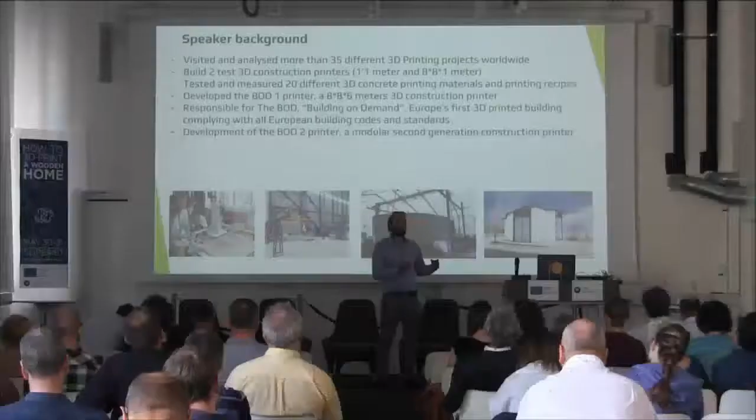This project was finished this January, and in February we launched a report in Danish, unfortunately, but hopefully soon it'll be in English as well, covering the basics of what is actually going on in terms of real projects out there in the world. So I'll try to go through this today and give a global overview of what's happening within this field right now. Later today I'll cover the project we did ourselves in Copenhagen, but I won't go into detail about that right now.

So who are we? We are actually a 3D printing company. We have no background in construction whatsoever, but 3D printing is our specialty, and we saw this area moving forward, so we decided to spend some time digging into it. After that, we spent more and more time and resources in this field, and now we're just about to put all our balls in one basket, so to say, and work entirely in this area in the future, because we find it very exciting.

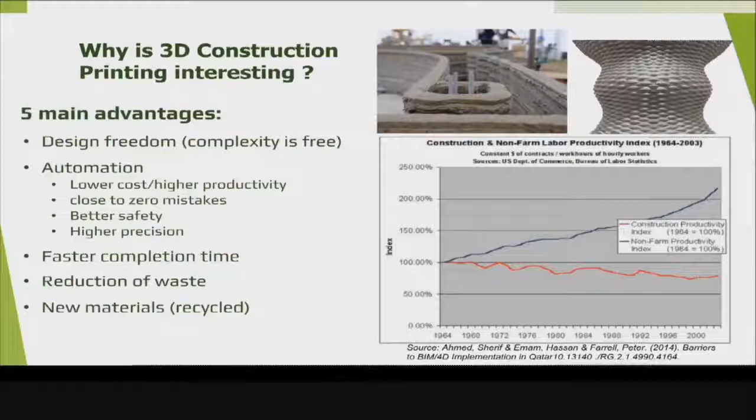There are a lot of reasons to go into the construction industry with automation, 3D printing, and other technologies. Some of the main advantages, just before we go further, is obviously the design freedom. We've heard a lot about this yesterday and today, that 'complexity is for free' statement. It's not totally true, but it will be, I guess, in the future.

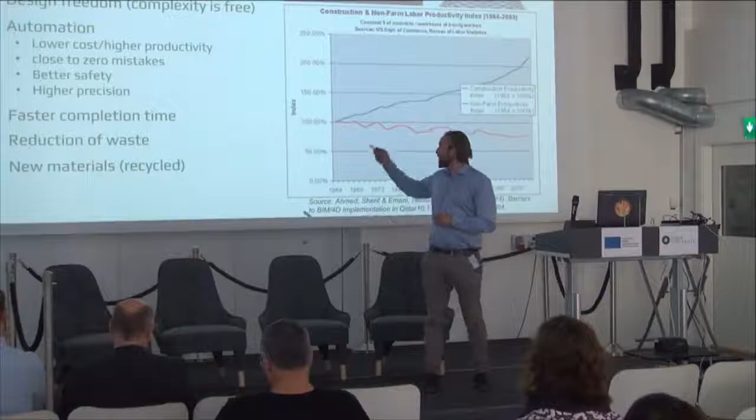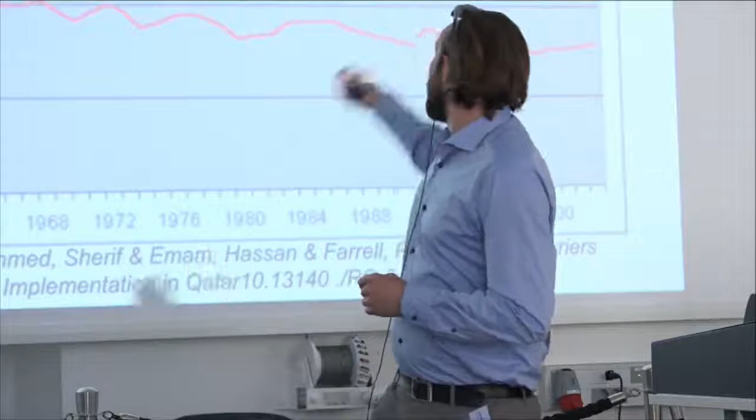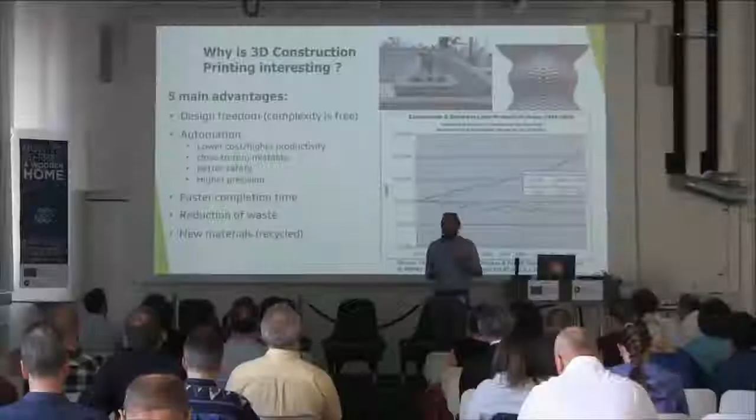Automation aspects as well, lower cost, higher productivity. If you look into the construction sector, the whole industry hasn't actually increased that much in productivity compared to regular manufacturing during the past 40 years, for many reasons. It's not weird at all, but this is one of the technologies we believe can add to the solution for that issue. Less mistakes, better safety, higher precision - definitely not yet, but in the long term. Faster completion time, reduction of waste, new materials, etc. There are many great advantages if we look a little bit ahead in this area.

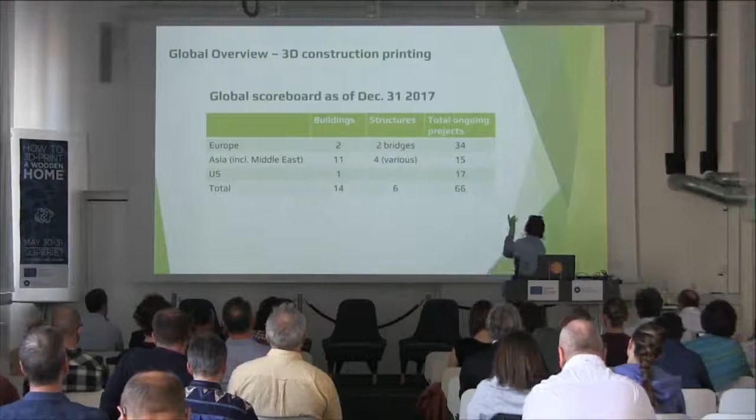So the global scoreboard right now - this is from December 2017, and this is buildings. If you look to Europe, we have 2 completed buildings at that time. By buildings, I mean real finished structures that actually have permission to be used as buildings, not test objects. The other ones are structures or other projects.

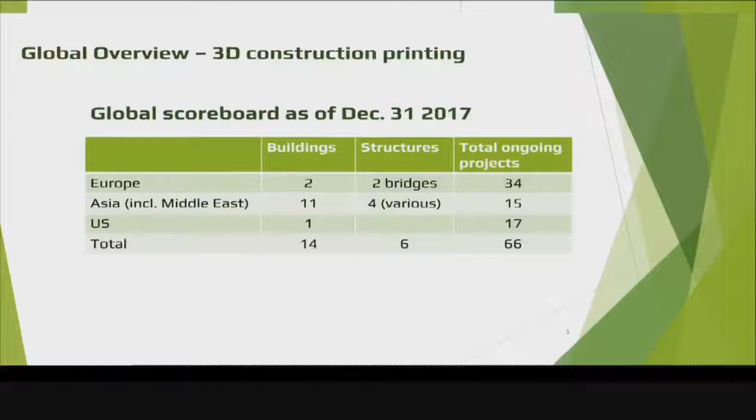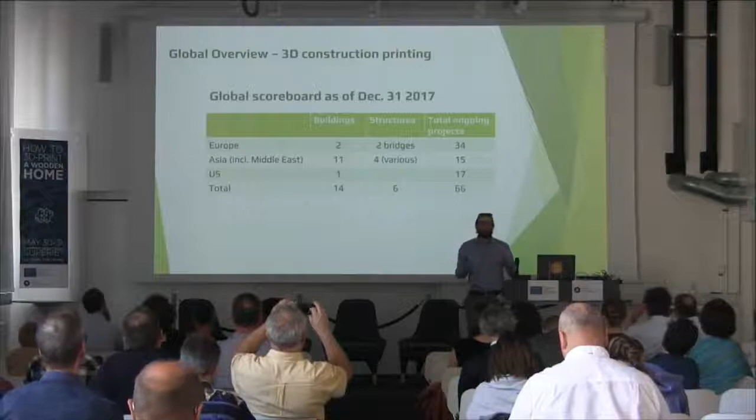If you go to Asia, we have a lot more, and I guess actually this number is a bit low, but these are the ones we could verify are actually being built. It's always very hard to tell if you haven't been there yourself, whether it's actually been 3D printed or something else, but these are the ones we could verify. The US at that point had one, and one more came in March this year. So a total of 14 buildings 3D printed in the world. Very few, but it's still 14.

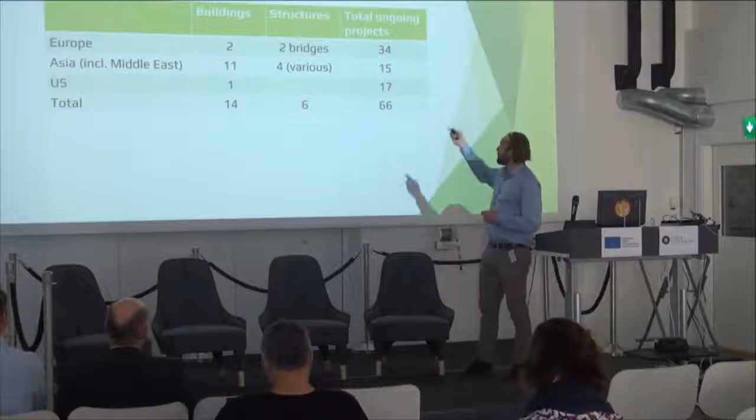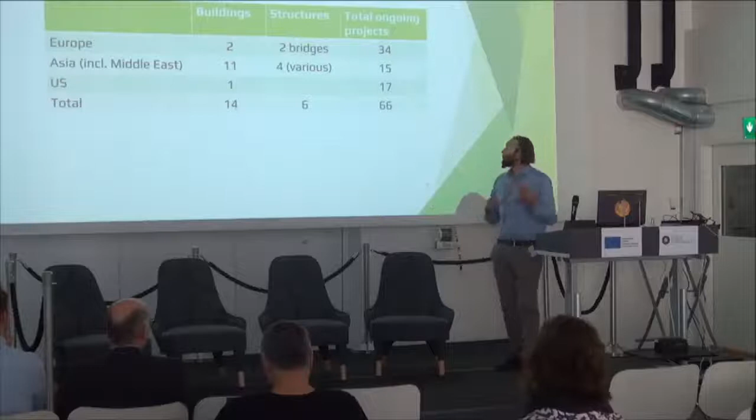If we look at other structures, we have a couple of bridges in Europe, 4 other structures like bridges in Asia, nothing in the US as far as I know, so 6 in total. And if we look at the projects worldwide, we're roughly at 66 projects. It's actually higher now because we made the total count back in September last year, and a lot has been added to the field since. It's a very fast moving field, and a lot of people are going into this area, so it's very hard to take a snapshot of this and present it.

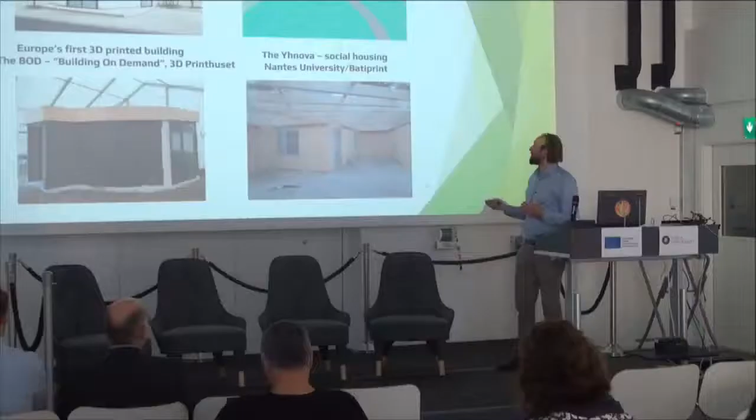If we take a short look at the projects here, this one is our own project in Copenhagen, one of the 2 in Europe. As I said, I won't go into detail with that right now, it comes a bit later.

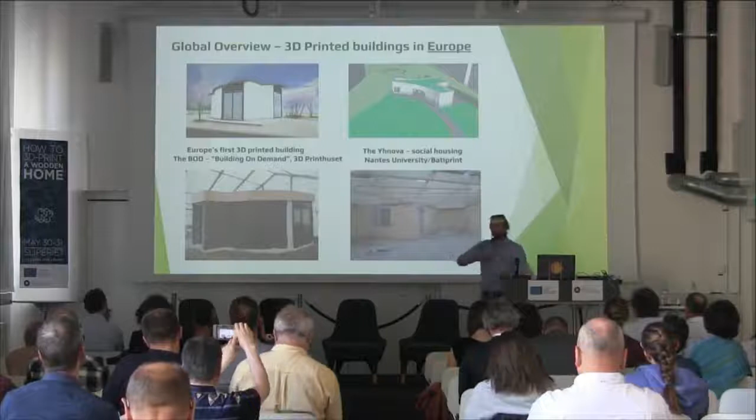The other one is a project in France, in Nantes, whereas we've used an extrusion of concrete. In France they actually printed the insulation foam and cast the concrete afterwards. So it's the reverse way of working, but a very interesting project as well.

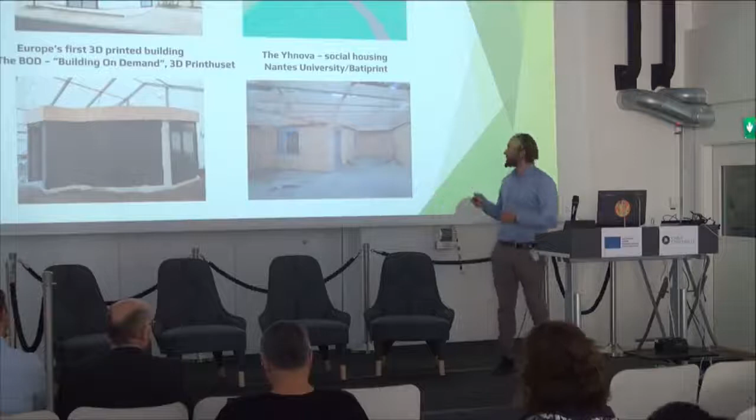If we go to Asia, this one someone presented yesterday, I think 3-4 years back. The Chinese company Winsun announced they had built like 10 buildings in 24 hours, and it cost like nothing, and so on. Since then, they've actually been printing a lot of other structures, some quite impressive ones. They're definitely the leader in terms of number of actual projects realized.

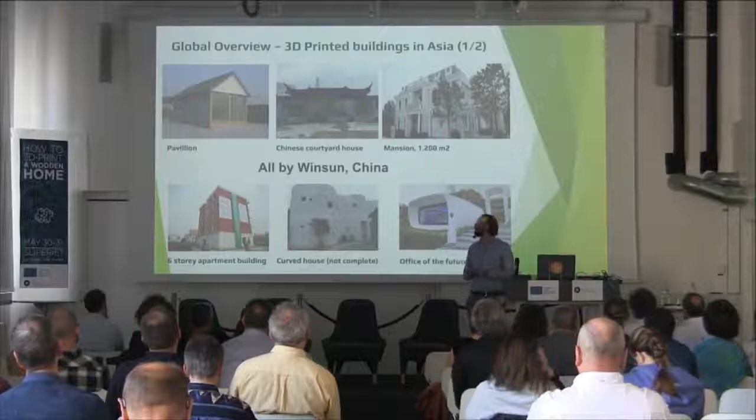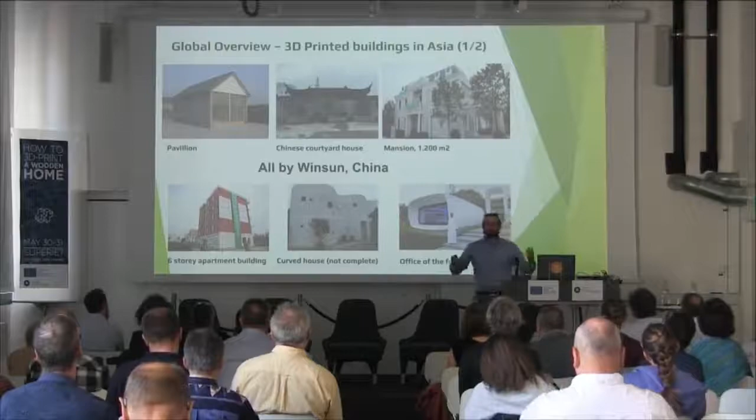But as you can see here, this is the real printed surface, so this is the printed part. There's obviously been a lot built onto it, and I will come closer to that fact later. We have something in Dubai that's also printed by the Chinese in China, and shipped to Dubai.

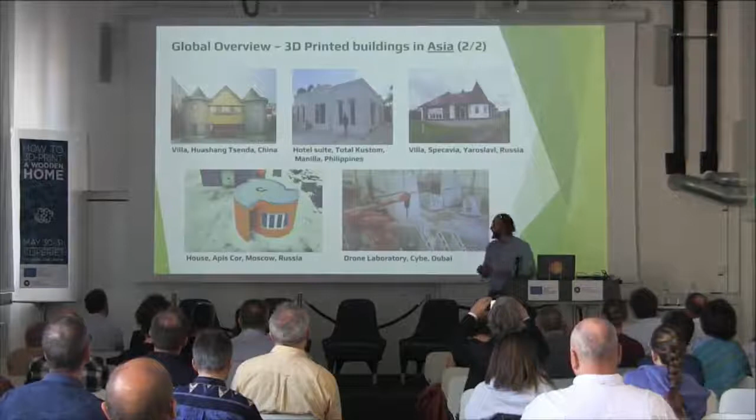We have some more houses in China, a couple in Russia, and some things in Dubai. This one is on the building side, an actual hotel suite. It was big in the media a couple years back in the Philippines. This one in Yaroslavl in Russia is also a real project. This one is in Moscow or close to Moscow, on a construction site as well.

So of these 5 projects, these 2 don't have a building permit, they don't really live up to any standards, they're just produced on a construction site. But these 2 are in use for real, and this one as well.

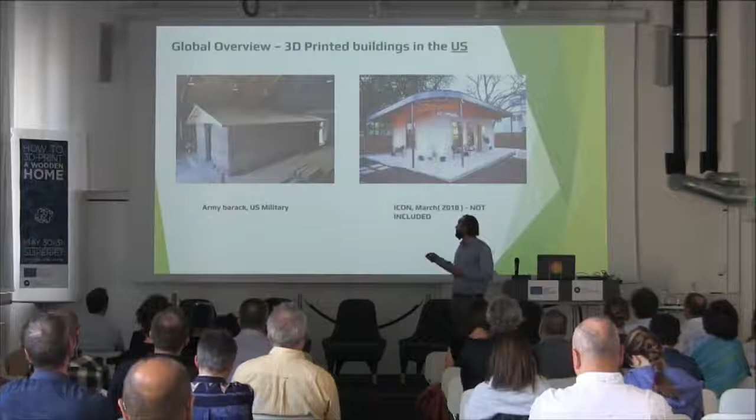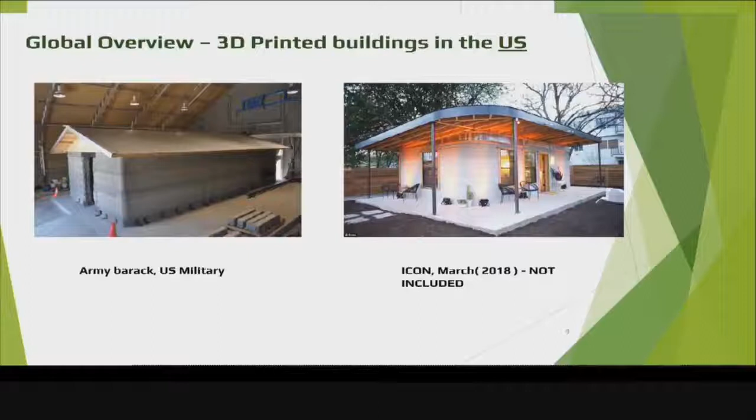If you go to the US, a bit behind in terms of number of projects, but ahead in some other fields. The US military announced this building last year, and then this year in March - I haven't included it in the total count, but wanted to show it as well. It's a house from a company called Icon, that launched this as a concept for cheap homes in the future in the US.

So this is actually all the finished constructions in the world. It's very, very hard to get a global overview. Thank you so much.

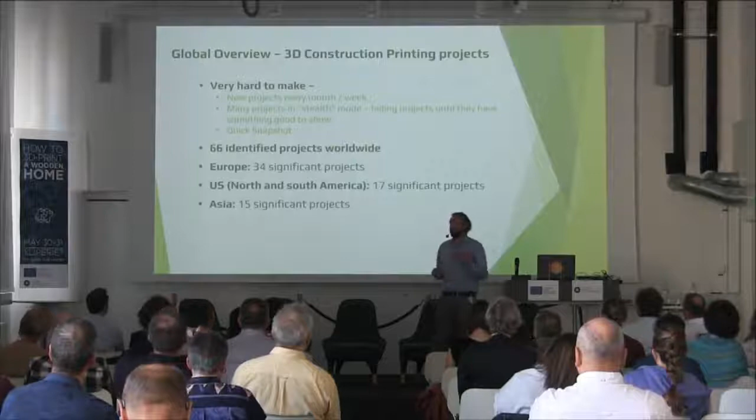Now I want to say a couple of words to that, a short conclusion on the overview. As I said before, it's very difficult to make a complete overview of an industry developing so fast, because new projects pop up every single week. New things happen, and some projects go under the radar and aren't big in the media. So if you're not very attentive, or don't by accident stumble upon them, it's not sure we have them within the project.

So there might be some projects we have missed as well, obviously. But yeah, 66 projects worldwide. By projects, it could be, for instance, universities researching in a field for more than just one project, but for a longer time, like this project here.

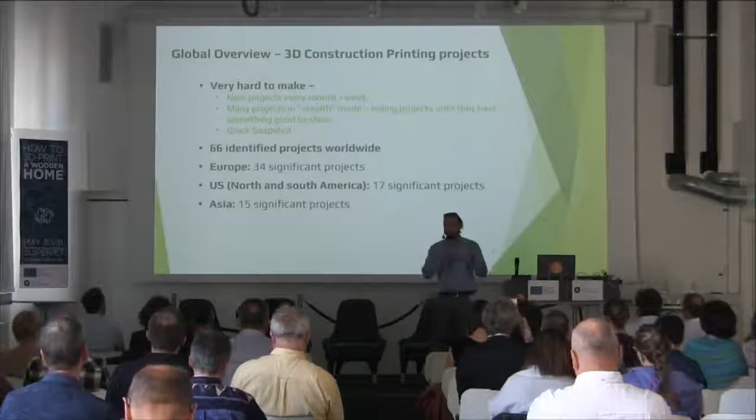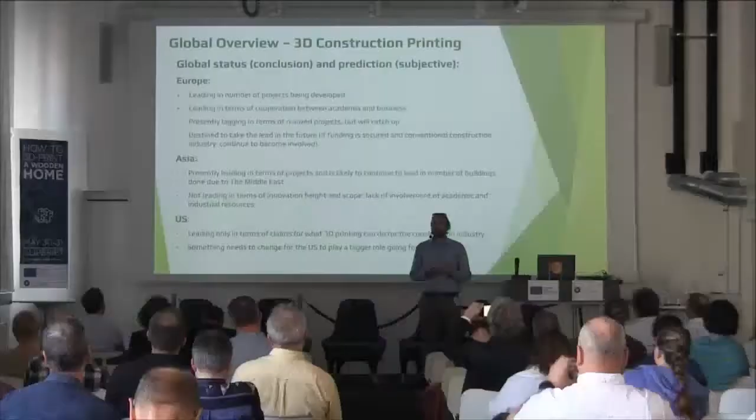So if you could say something in general about what is happening where - if we look at Europe, we're actually leading in terms of number of projects and the level of research here, because we don't have as many buildings compared to Asia, for instance, but we have many more projects and a higher level of technology, if you look at the European research institutions and companies. I think we will catch up in terms of number of projects very soon, because it's starting to be easier to get the permits, and once it's been done once or twice, it gets easier. So I think we will catch up soon.

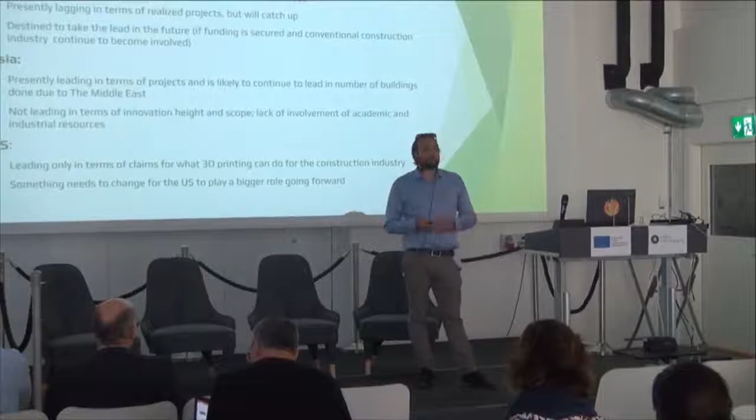Asia is definitely leading in terms of commercialization of this technology. But if you look at the base of what they're doing, they're using a very simple form and shape of the technology, but doing a lot with it. So in that area we have a lot happening, but the research is really developing in Europe. The US, for a number of reasons, is actually quite behind, and it's a bit weird because it was invented in the US by a guy called Khoshnevis, who has claimed around 100 US patents within this technology - so that might have scared competitors off.

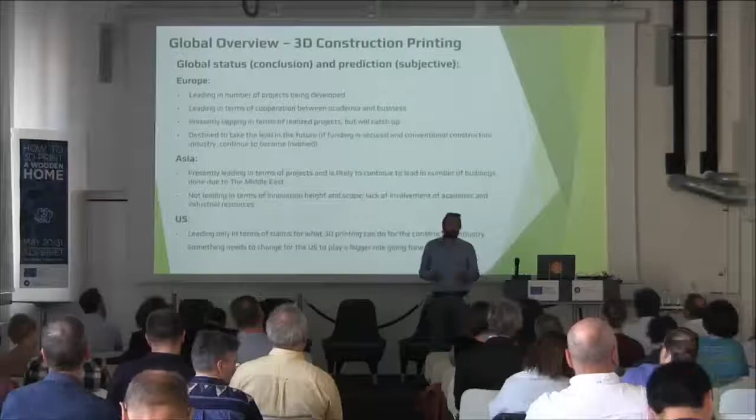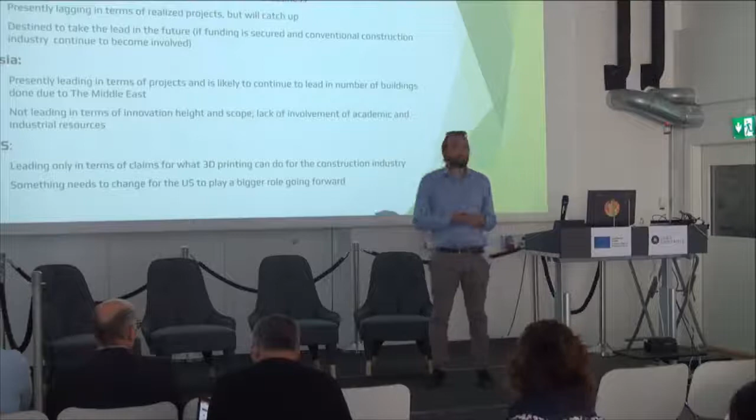It could also be something with the ways you insure houses in the US that keeps them back. But now we have two houses, so it's the same in Europe. So it could be that they are actually developing fast as well. And then again the Middle East, which right now we count as Asia, will be moving a lot forward, especially Dubai and Saudi Arabia are really pushing into this area. Most European and Chinese companies working within this field are actually working as well in Dubai and Saudi Arabia to do new projects.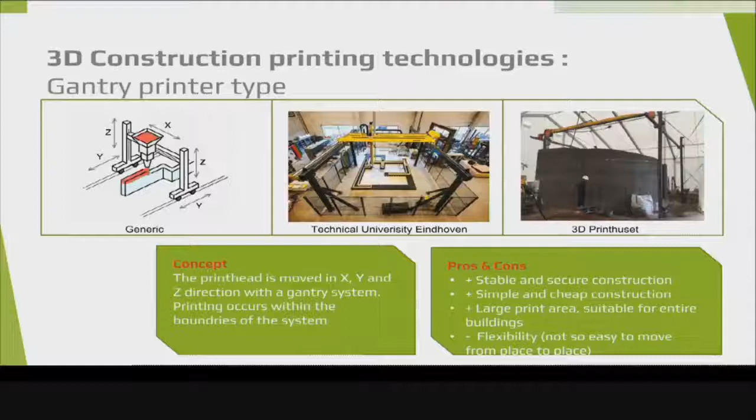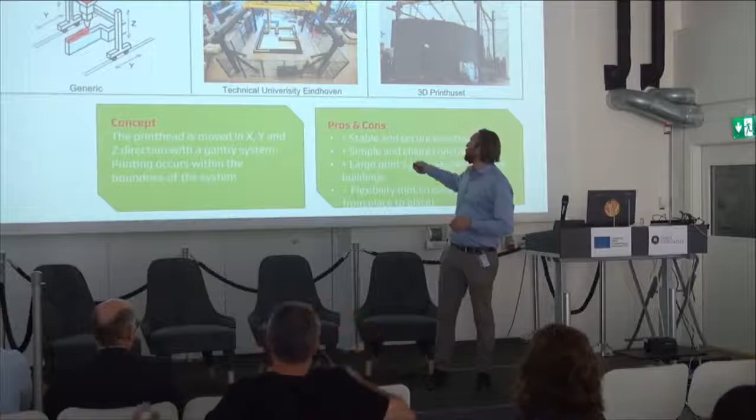As you can see, it's the way the University in Eindhoven is printing, and it's the way we have printed. It has the pros of a very stable, very simple construction. Obviously it's quite difficult to move because you need to uninstall all this base, move it, set it up and calibrate it. So it's very stable, easy to use, but difficult to move. We have seen quite a few of these machines in construction halls, like this one in Eindhoven, and fewer of them actually on site, except for our own here.

Then we have the robot arm, the robotic arm. Usually there's a couple of European companies that work with this, like Cybe, for instance, and XtreeE. The concept is you take a standard industrial robot, which is quite easy to purchase, and then apply a printing extrusion nozzle of some kind, as you can see here, and then make shapes. It's a smaller mechanical system, but it's very well supported by the industry. It's standard robots, so you can get spare parts everywhere. It's easy to move, but it's more expensive.

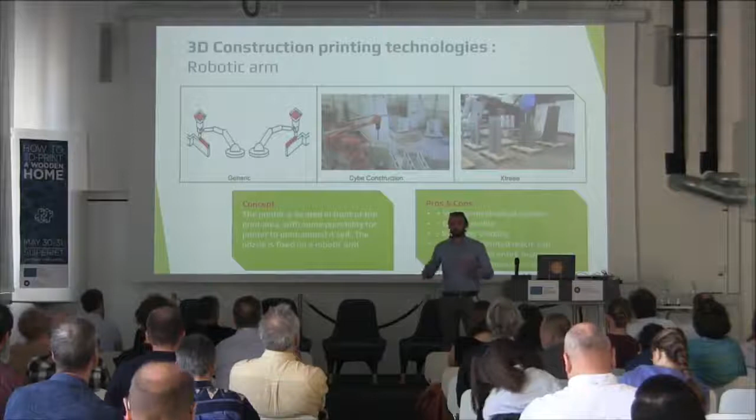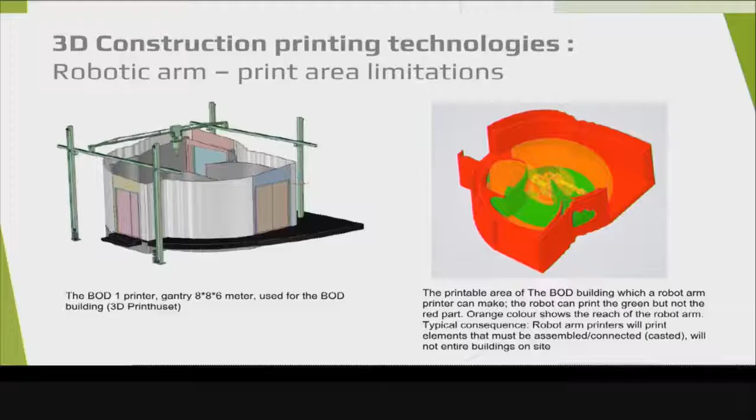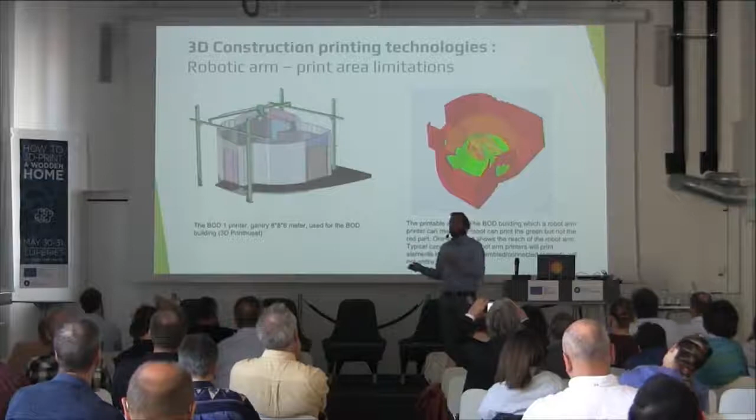It's a bit more difficult to program and control, and you have a more limited printing area compared to the other ones. So there are advantages and disadvantages. As you can see in this example of our house, if you took a conventional industrial robot, one of the biggest you can actually get, it's really hard to print an entire structure with it. So for the robot arms, you can see right now that they are printing more in terms of modules that you apply to the buildings, while the gantries are printing either entire buildings or larger modules. That's the difference right now between those two technologies.

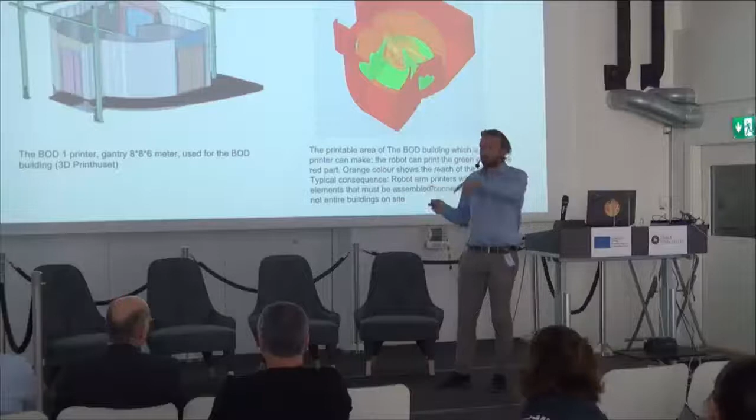There's a couple more, for instance the powder-based print we heard about just before, and some crane systems, but they are not very widely applied yet in the construction industry.

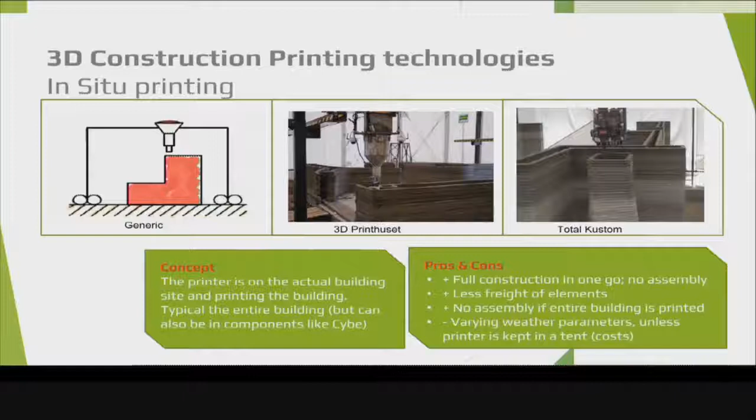Then in terms of construction, you can build on-site or you can build in a construction hall. When you print on-site, you have the advantage of no assembly, so you can just print directly and you have a house. The disadvantage is that you need to move the printer out there, set it up, calibrate it and get everything to work. You are also quite vulnerable to weather conditions, environment, temperature changes and moisture levels and so on.

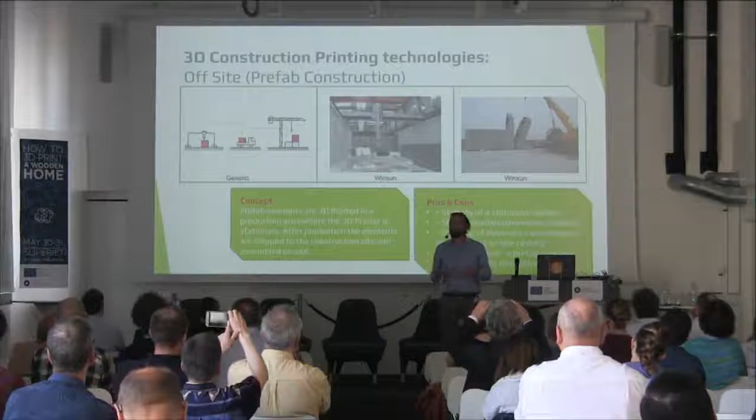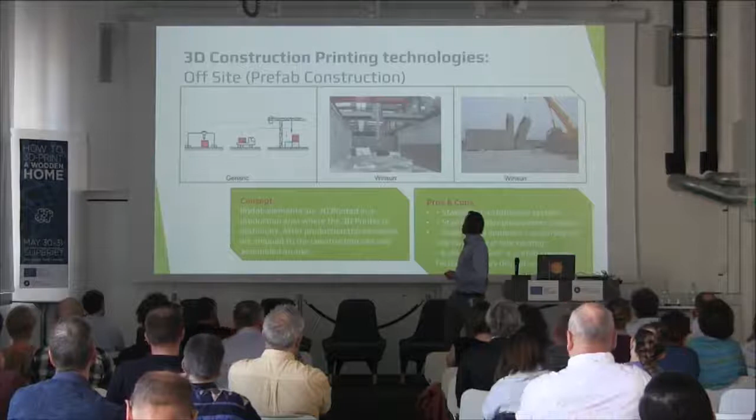Whereas if you go to the in-hall production system, you will have very high control of your environment, the same stable conditions every day. So it's very easy to print a lot and have stable conditions. But on the other hand, you'll have to transport the elements out to the site and install them there. So there are applications for both, and both are being used out there. All the Chinese ones, for example, are made in a factory and then transported and installed on site.

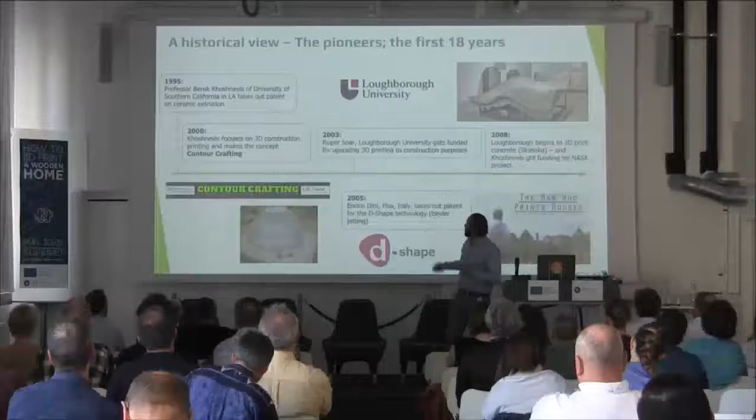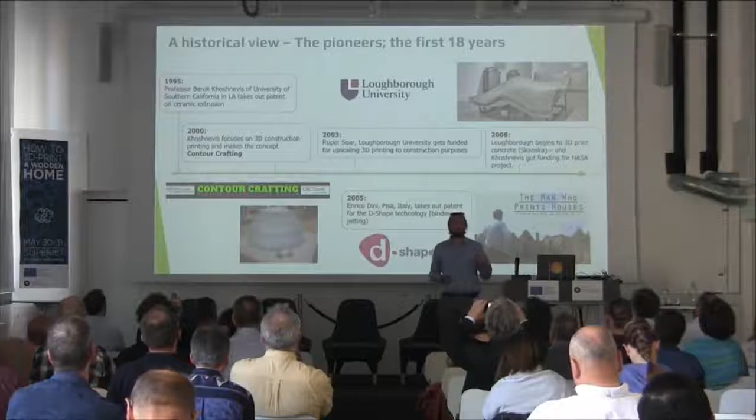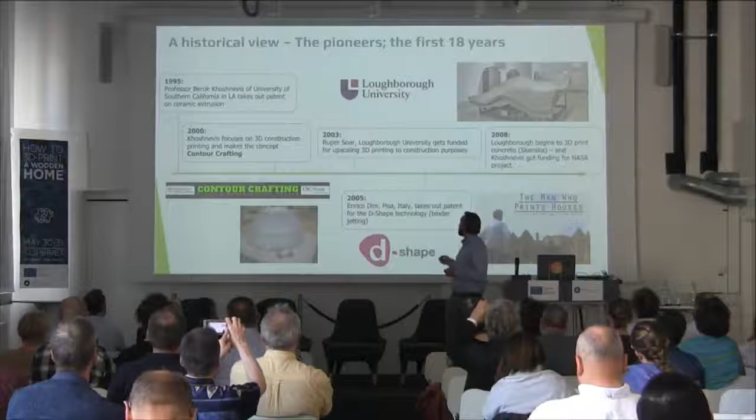In terms of history, if we go a bit back, Khoshnevis Berok, I think he coined the term in '95, but formed the company Contour Crafting a little bit later. He was the first to actually start taking this additive manufacturing into the construction industry. Since then, during the 2000s, it was kind of slowly picking up. We saw Loughborough University going into the field, and Dini, who I believe made the technology for the powder-based printing in Italy, is actually quite early as well. Loughborough, they're now, I believe, working with Skanska.

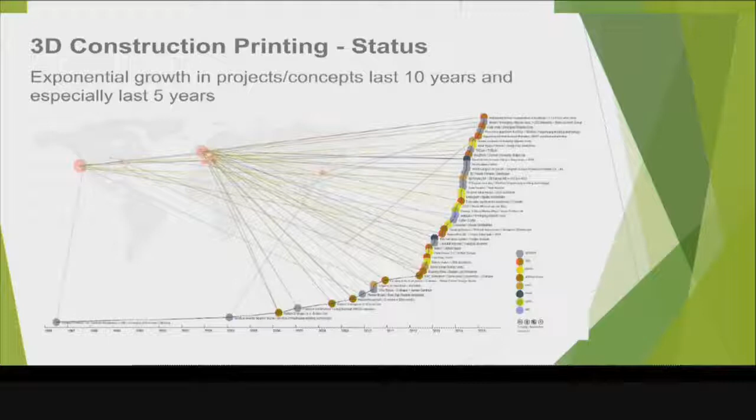But then, it might be a bit tough to see from there. This is 2012, and this is 2015. So you can see a lot of projects coming into the field. There's not been any slides like this made since, but it's really exploding right now.

So these can also just be small test or research projects, but there's so many people going into the field right now. So it's really amazing. It's a really interesting field to be in because so many different things are happening all the time.

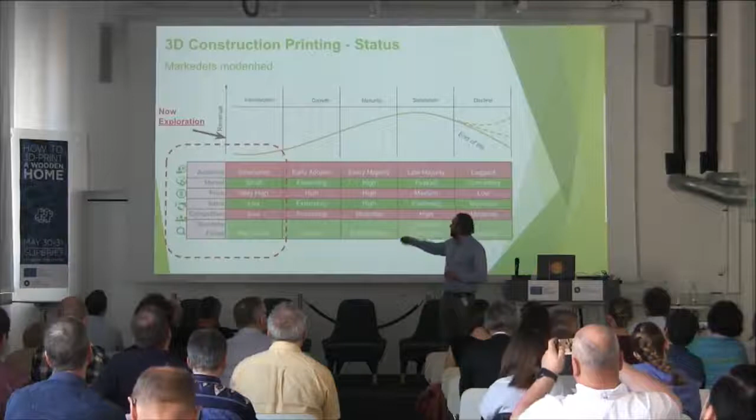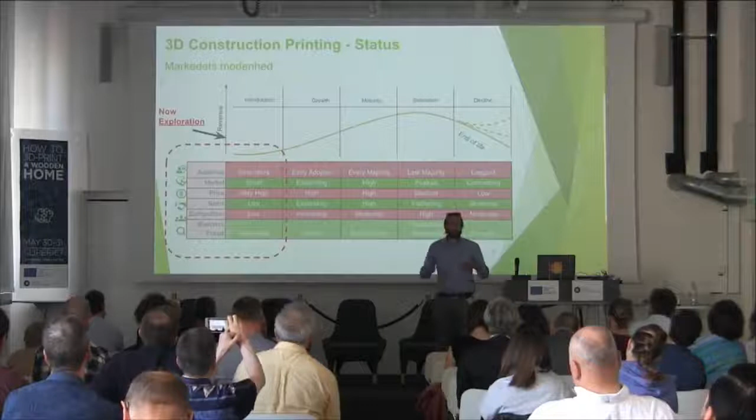But if we look at the state of the art, where are we in terms of this technology, and can it actually be used out there in the construction industry? If we look at how technologies usually are adapted into a culture, we usually see an introduction of technology where we have mostly innovators, people like all of you, who are really thinking ahead of themselves. Very small market, very high prices, low sales, low competition, and the overall focus of the business is awareness—going out to tell about the technology, to showcase, to do tests, and learning and development. Then if you get further, you'll hit maturity and actually have a market.

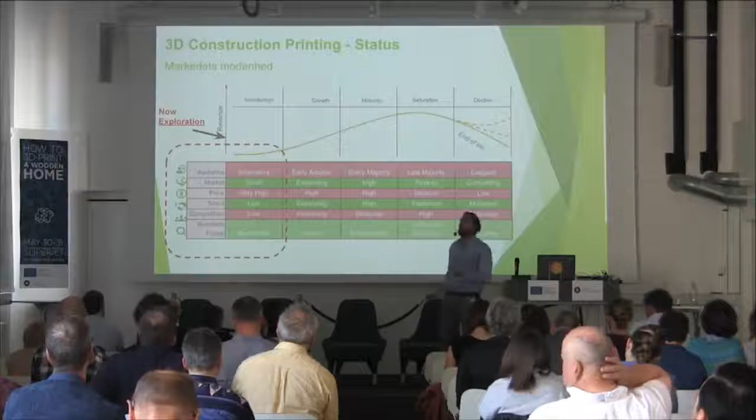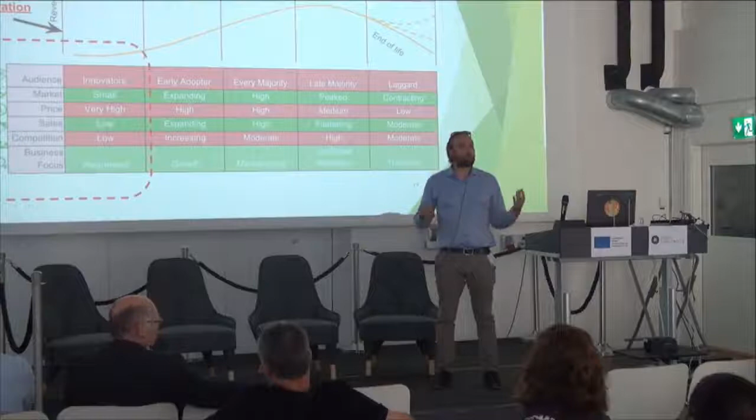But just to be very clear, the overall technology, we're here. If you look all the way around, all houses being built right now with 3D printing are demo projects. We don't see any demand. It's very slowly beginning, but the demand is close to zero. It's maybe 0.01% of the construction industry who are interested in this technology at this point.

But obviously that will change. Right now we need to recognize we are really here. It's a new technology, but that's all right. It needs time to develop.

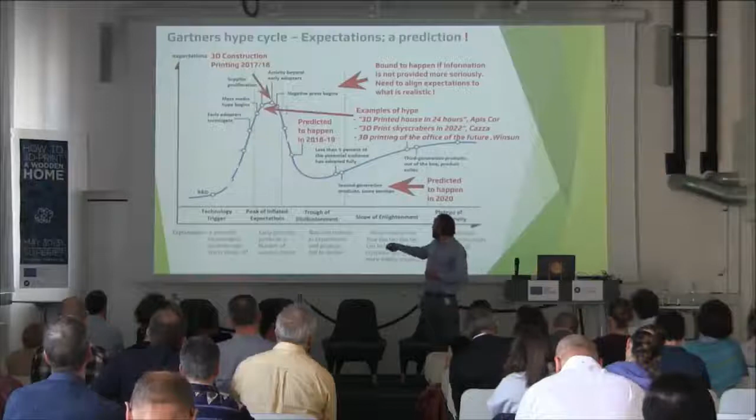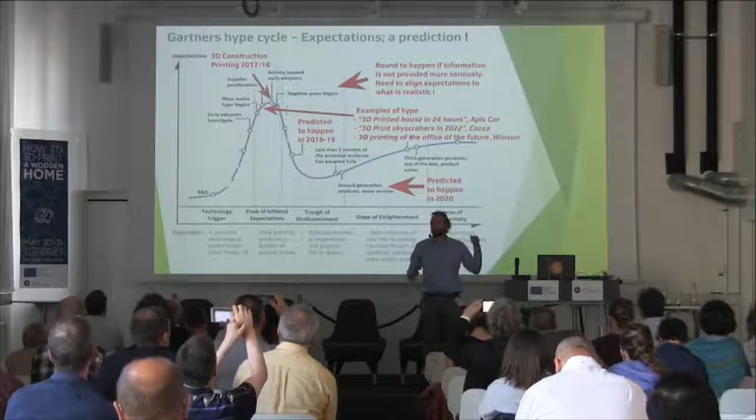If some of you have heard about this curve, the Gartner hype cycle—it describes that if you take a new technology and put it into the market, at some point in the early years you'll hit this point, where the hype is going upwards and the time going outwards. You'll see crazy articles and create this media hype. You've seen it with many other technologies like VR, cell phones, computers, internet, and so on.

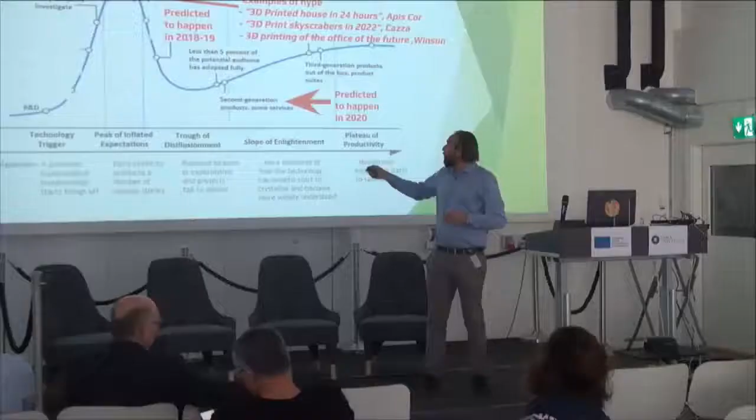You'll see it in almost every new technology you get introduced to. You'll have some type of hype that at some point will disappoint, because people think it can do a lot of things and then it can't really do anything. And then the whole media, the common people, lose interest, but the industry moves forward and creates the second generation of the machine, then moves forward and creates the third generation and starts making projects, and so on and so forth. Then slowly it will come in.

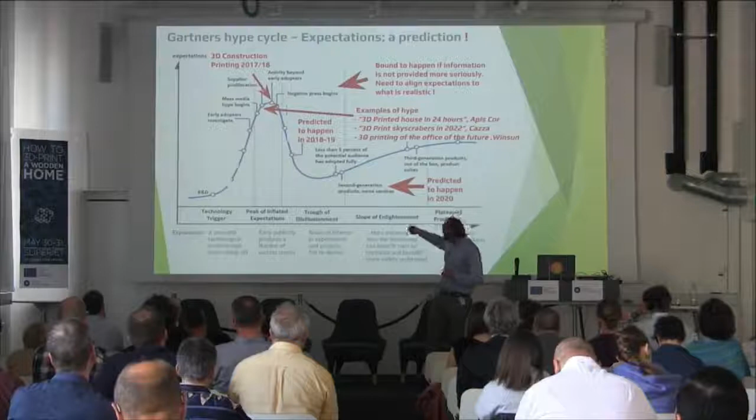So our estimation based on what we have seen right now is that we are actually just about at this tip right now. We have seen a lot of crazy claims in this industry. I don't know if you are from the industry, so you might have seen some of the YouTube videos.

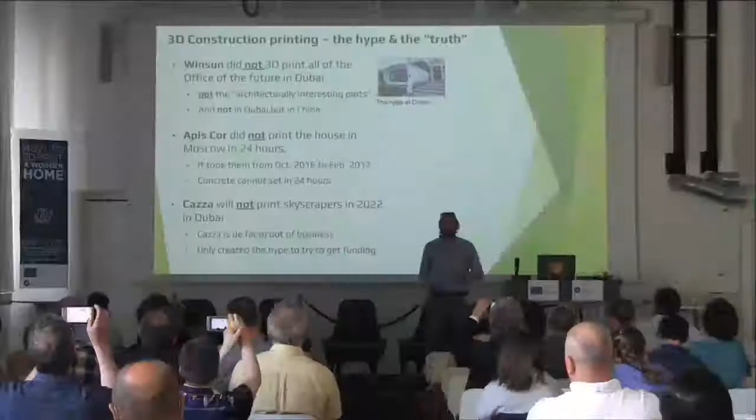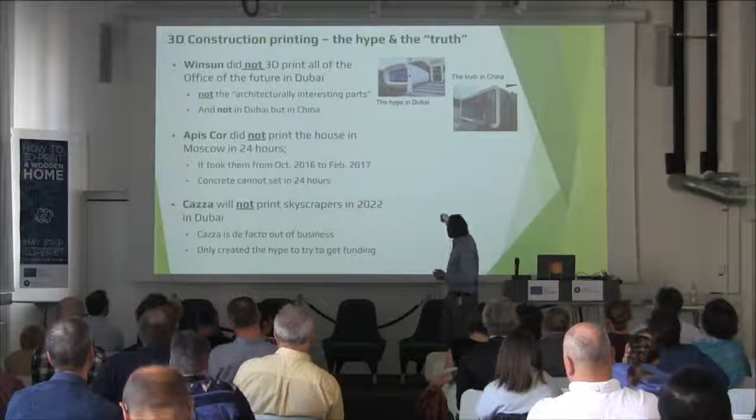For instance, we have this office of the future in Dubai—wow, so much design, so interesting, and so on. But then you go to China and see the real thing behind all this shell. It's obviously still impressive, it's 3D printing, but it's really a simple shape. You could have cast that quite easily. All the interesting architectural details are actually made by craftsmen afterwards. So there's this one—it's really interesting, and gets a lot of media attention, a lot of articles, but this is the real deal. This is what's actually 3D printed.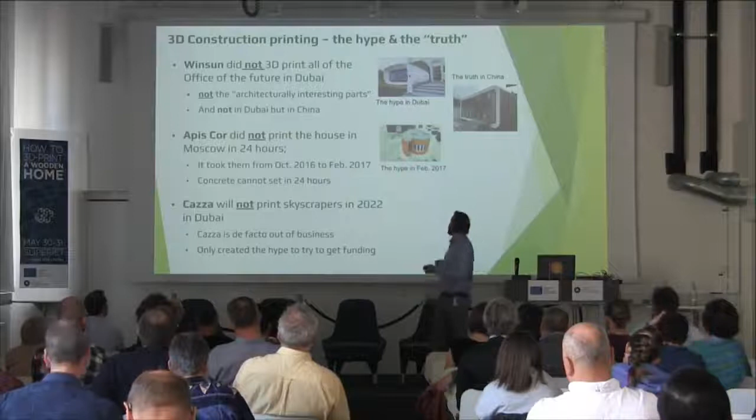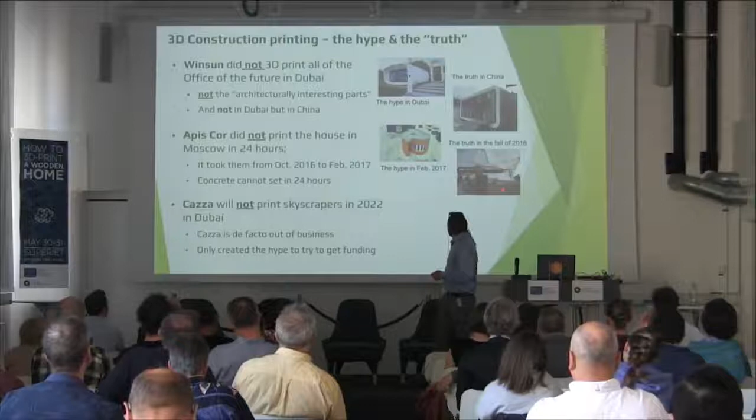And then we go out to see, like, '3D printed a house in 24 hours.' And they said that in 2017, in February. But we went to visit them in the fall of 2016, where they spent 3 days printing this. So this is obviously not true either. There's a lot of this hype being created out there that's simply not true.

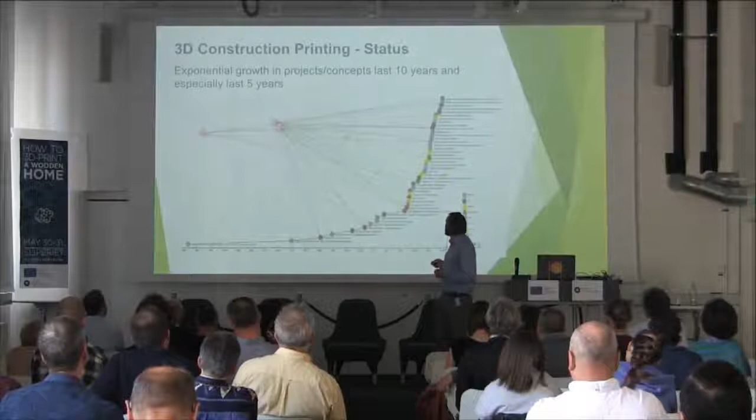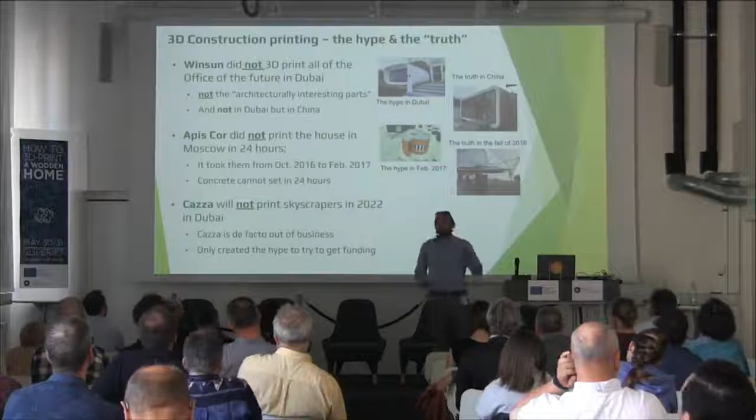And if we go back, here you can see the focus is awareness, so it's not weird, it's all right. But I think, if we don't want to disappoint the industry too much, maybe it's time to cut down a little bit on the hype and start making more real projects.

Last thing, I don't know if anyone actually got to notice this. There was a company called Cazza who wanted to build skyscrapers in 2022 with an app.

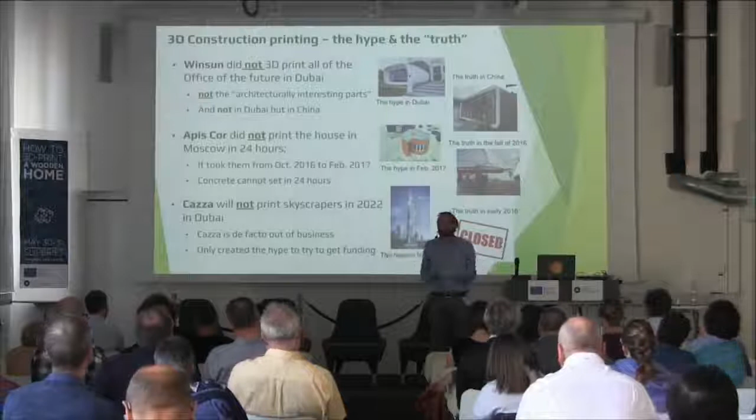They're closed now, but it was just another example of it's just not doable. You need to be realistic here. It's really good to dream and have visions and look 10 years into the future, but you also need to say, what can we actually do? What is possible right now?

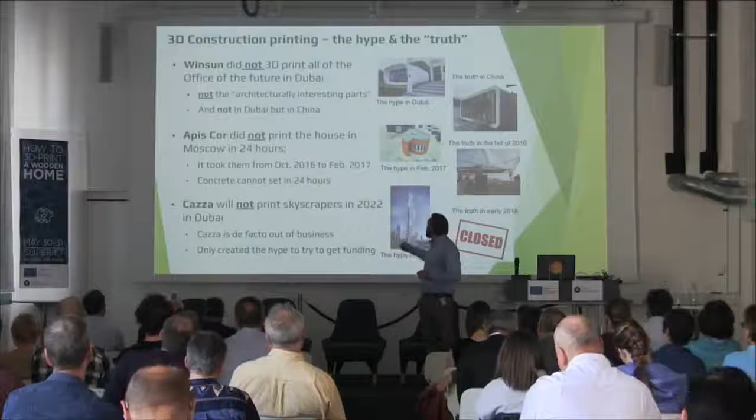We've also seen a lot of hype around the pricing. For instance, you'll see YouTube videos where they say, we printed a house for $1,000. All right, cool, I want to buy a house for $1,000. Someone called you the day after. But then you go into the economics of it.

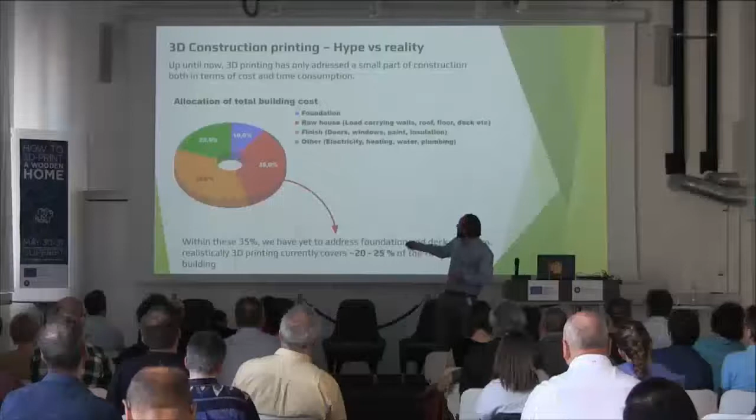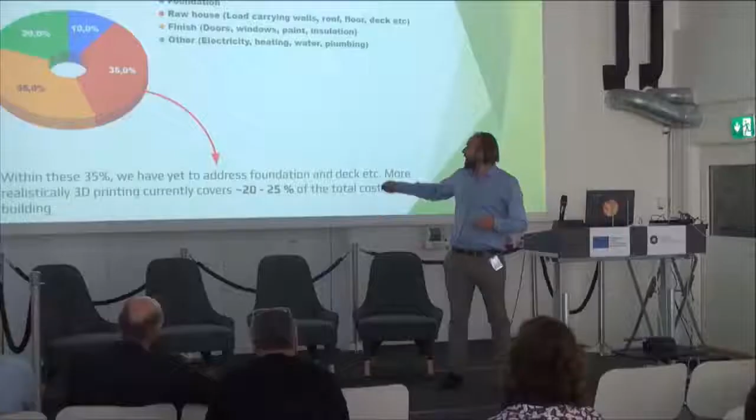If you look at the pure production cost of a house, this is really raw - obviously there will be variations, but let's say a high estimate is 25 or 35% of the price of the house is the raw house, which means load carrying walls, roof, floor, deck, etc. Right now, everyone who is 3D printing anything in construction, they're only biting into this area. There are still a few doing roofs, but most are not doing roofs. So let's be honest, we are maybe going into 20-25% of the price of the house.

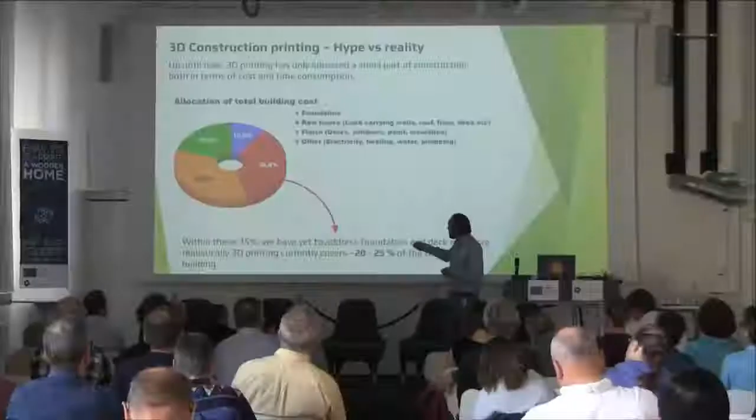So obviously, the claims - there was a claim by McKinsey, I think half a year back, who said that 3D printing could save like 80-90% of the cost of the house, but that's very, very difficult if you're only working within the 35%. So obviously there are some things for the future when we start to bite into these areas - to finish, to paint, to install doors, all these other areas. But right now, to be completely honest, we are here. Everyone is here. And if they say they're not, they are simply lying. It's not true.

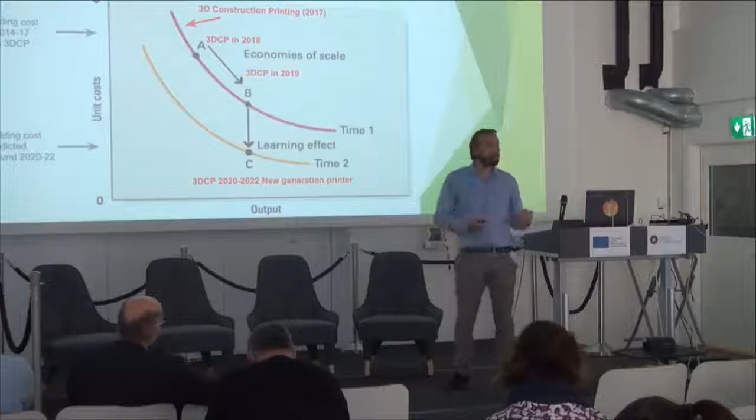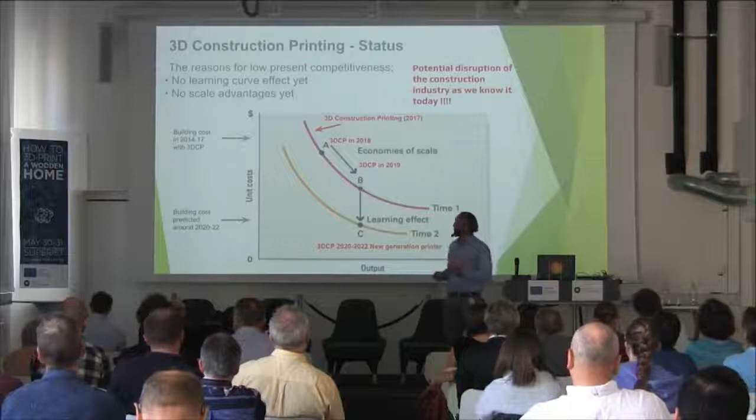But it's also all right, it's completely natural for new technology. You don't have to be world champion the first time you do something. It's completely normal - for instance, most of the houses you've seen right now, except for the Chinese ones, are one of a kind. It's companies who've only made one house in total in their complete lifetime. So obviously they need some experience in order, first of all, to be cheaper, to be better, to be competitive, and so on. With that experience, I think it's possible that we can print a house in one day and it can be really, really cheap, but we're just not there yet.

But the good thing, if you look at the positive side - it may look like I'm really negative and pessimistic about the industry, but I'm really optimistic actually. I'm just a realist. If you look at the past years, you have seen quite a lot of the conventional construction industry going into this field.

I think that's a really good sign, because at some point this needs to happen when you have such a large and very slow-moving industry. We can't really do anything without these guys. We can do some innovation, but in the end we need the large players in the field to move along, if we're not only talking about one demo house and one demo project, but if we actually want to do construction at a grand scale.

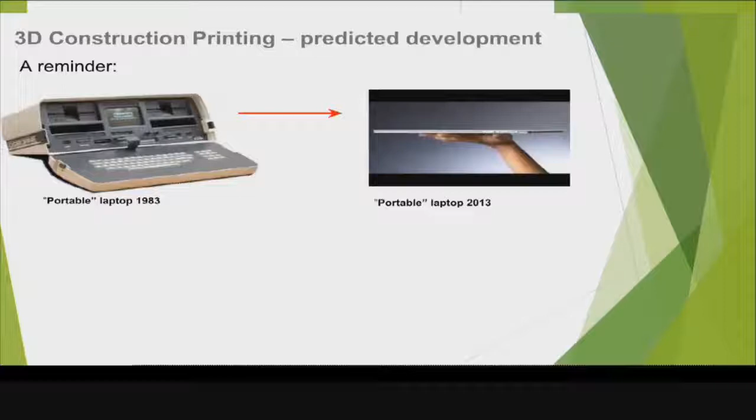Last slide. Innovation happens really, really fast. As you've seen with cell phones - I don't know, you've probably heard a lot of people say it - but this one, all of you have it in your pocket right now. Nobody had it like 10 years ago. As soon as it catches on, it goes really, really fast. So it's all right if it's bulky and weird and doesn't really work and is really expensive in the beginning, because it's just technological, digital development. It takes time, but before you know it, we're there.